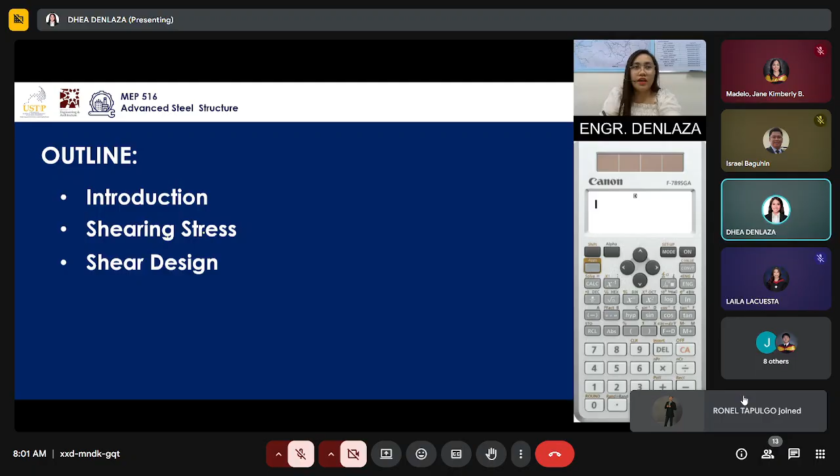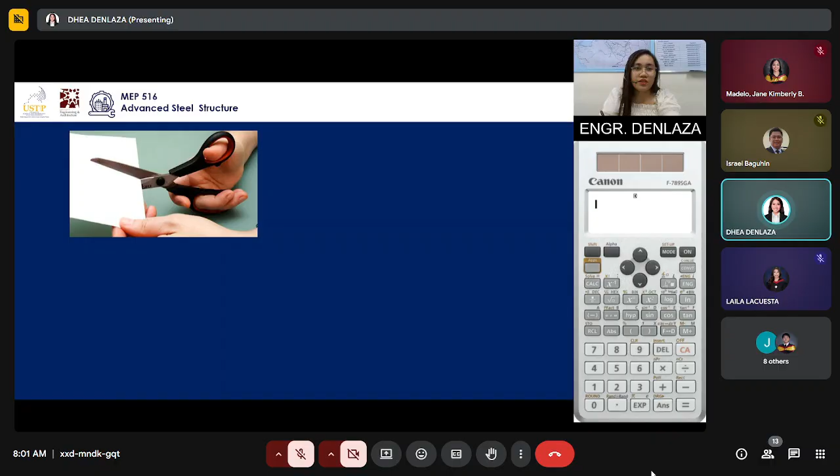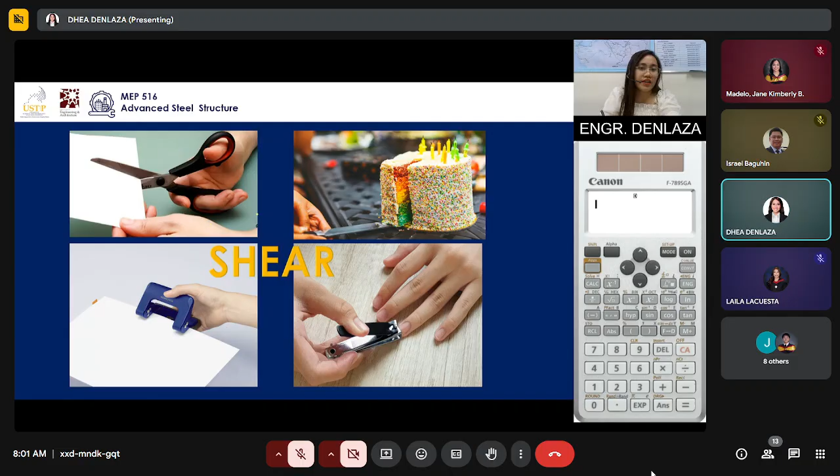Before we dive into our main agenda for this morning, I want to show you some photos. As you can see, cutting of paper using scissors, slicing of cake, punching a paper, and cutting your nails. These four activities are daily examples that we do, exhibiting the so-called shear. Let's try to associate it with our daily activities. These four activities that we usually do in our lives exhibit shear.

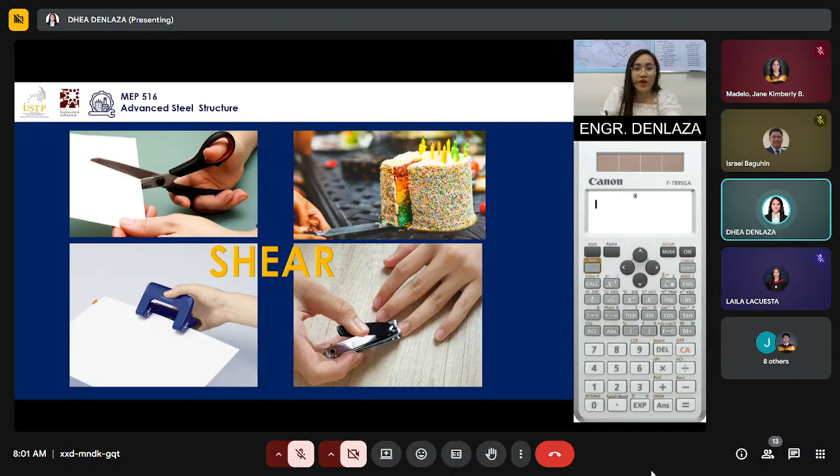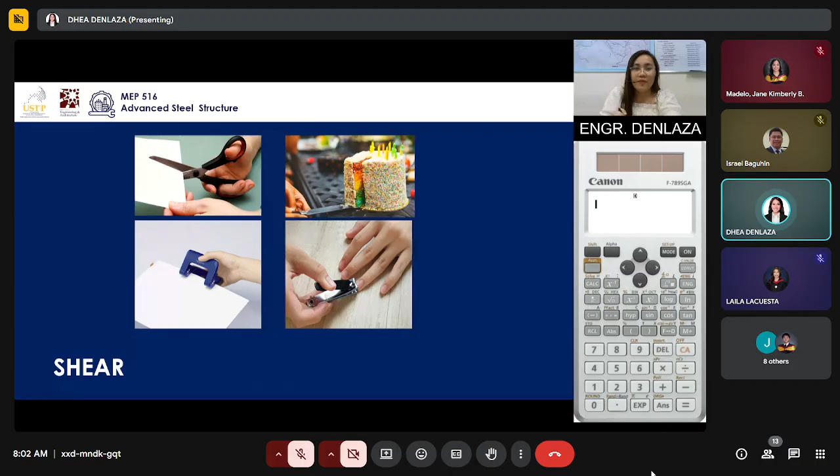Let's define what's shear. By definition, let's go a little bit technical. Shear refers to the forces acting parallel to a surface, causing parts of structural elements to slide past each other, leading to shear stress and potential failure. It's as simple as that. When you say shear, it's the force that is acting parallel to the surface area or the area of contact.

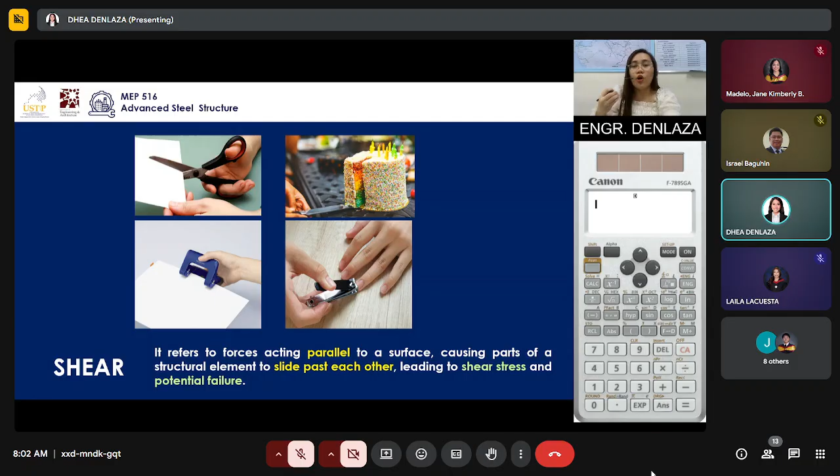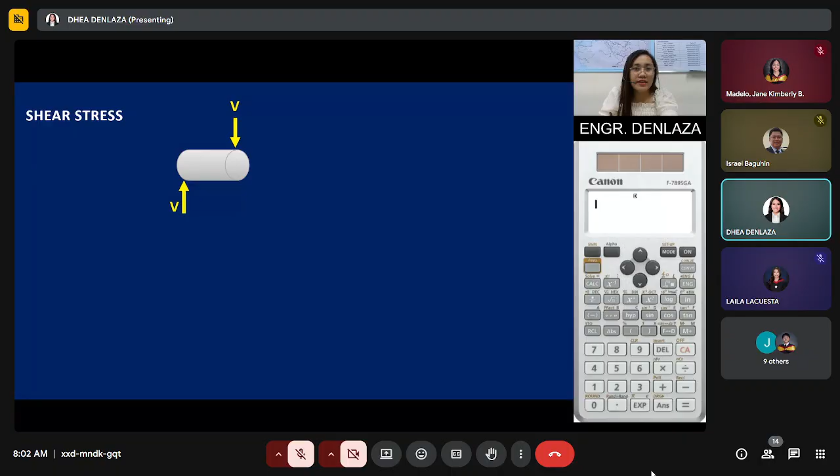The overarching formula for stress is technically force over area, the strongest and most relied-upon formula when we analyze stresses. But when we relate it to shear stress, there is a difference with the area to consider. Since shear force is the force acting parallel to the surface area, the area that we are trying to consider here is parallel to your shear forces.

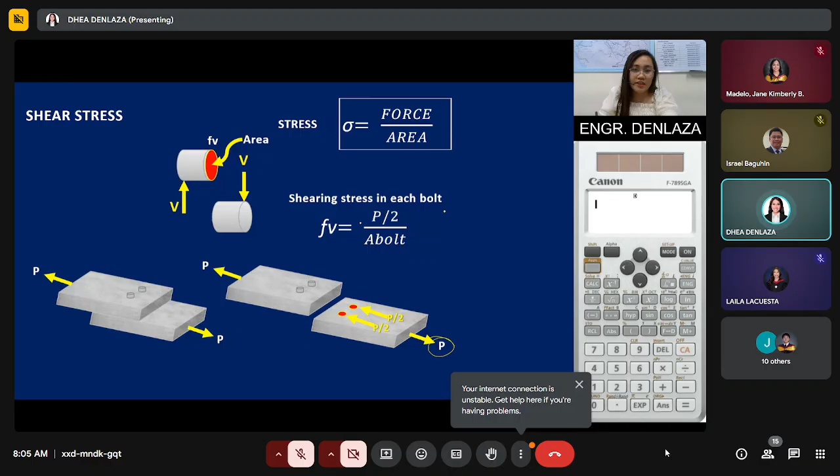Another example, another scenario where we experience shear stress. We have here a member, another structural member, subjected to force P. Now, if this force P is punched through, the result would look like this.

So as you can see, another shear failure here. And another area to be considered here, highlighted in red. This is the area to be considered when dealing with this type of shear failure. This is the so-called punching shear stress.

Punching shear stress has the formula of force over the area. But the question is, what area should we consider here? The area we will be considering is the force over the area, which is B sub O multiplied by its T.

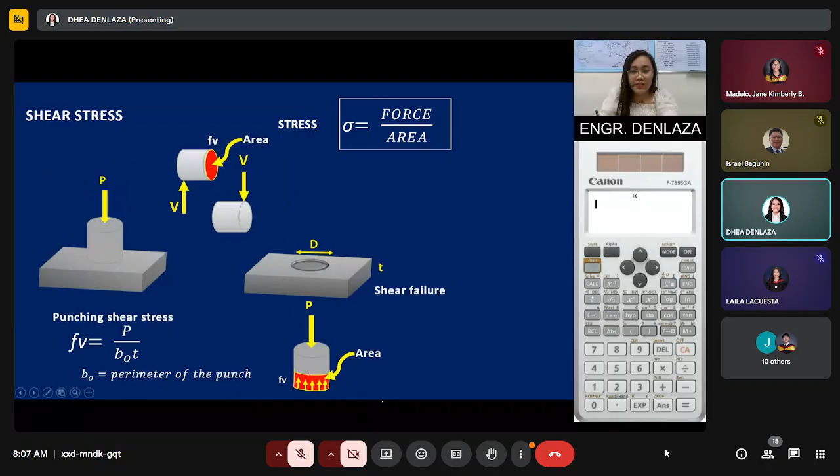Now, what is B sub O? B sub O is denoted as the perimeter of the punch. Technically, the perimeter is just this part here, highlighted in yellow, or highlighted in red. So that's the formula for punching shear stress.

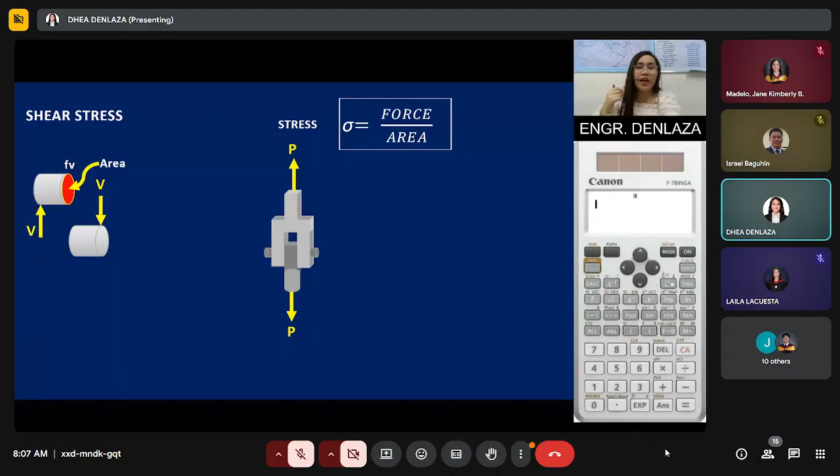Now we have another structural member. As you can see, the ones I showed earlier are just single shear, where only one area is to be considered. But in this part, I'll show another example, wherein if forces pull here, we will now consider two areas.

What are the two areas? Two areas because one is not visible from our POV, but there is a hidden area here, highlighted in red. This area and this area are the two areas you should be considering since both ends have failed.

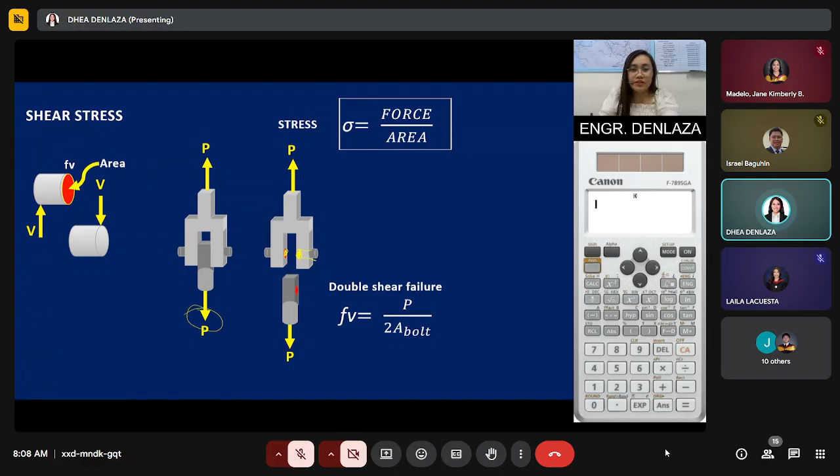Imagining that scenario, if we are trying to consider double shear failure, we will now be utilizing this formula, which is P over 2 multiplied by the area of the bolt. That's what is called double shear failure.

After that, I will be showing you in our next slides the common shear failures in steel structures that are visible here, by definition of these structures. So we have here an example of a shear failure.

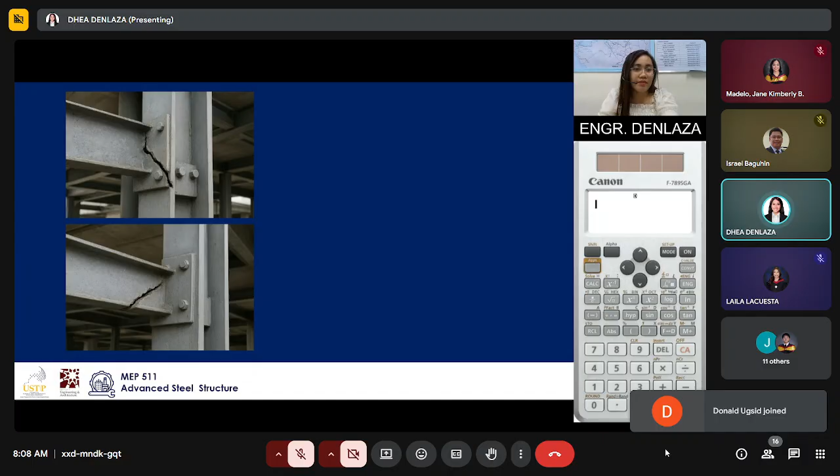As you can see in our connections, here's another example. And here, another one. As you can see, different scenarios: at the base plate, at the I-flange, along the edge of the base plate, and at the welded connection. Bolted as well as welded connections—wherein all of them are exhibiting shear failures.

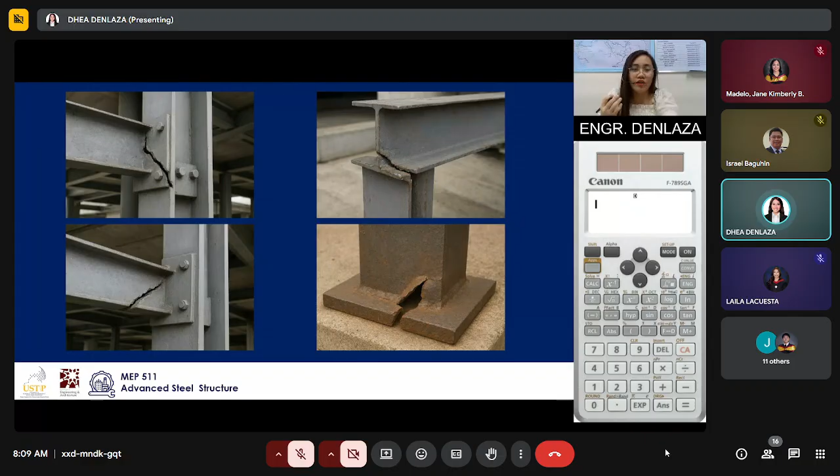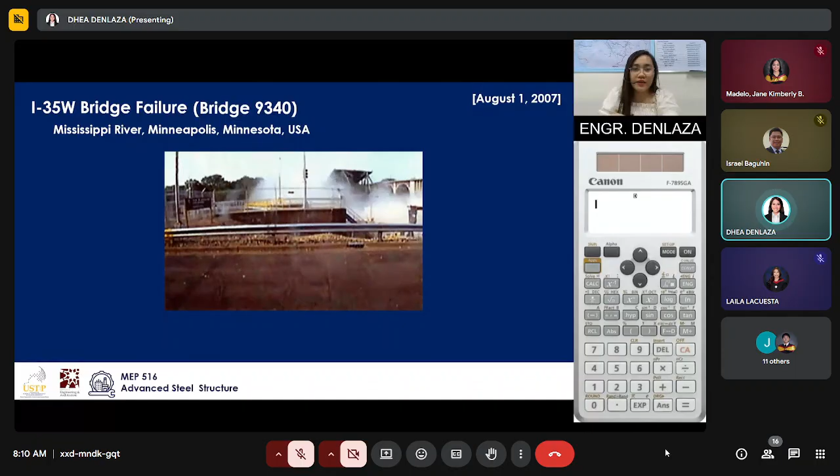As you can see, I have shown you here an image of the exact failure of the bridge, which happened on August 1, 2007. After this failure, there were casualties, but I opted not to include that because it's not something we should highlight—the statistics on casualties. Let's instead go over the technical issues of why this bridge failed.

Long before, this bridge had been constructed as early as the 1960s. But later on, structural engineers were able to distinguish one of its issues: the gusset plate at certain nodes were later found to be undersized, meaning the size it had was not sufficient to carry the loads it should have been carrying. If you look here, it's highlighted with a circle.

According to their research team or investigators, only 1/2 inch thick was used for the gusset plate, instead of the 1 inch thickness that was in the design. So the gusset plate experienced shear rupture along rivets—actually this photo was taken earlier than the incident—where the gusset plates experienced shear rupture along rivet lines and block shear tearing.

The gusset plates were unable to resist the enormous forces being transferred between the truss members. So once a gusset plate failed, the load path was broken, causing a rapid progressive collapse of the truss span.

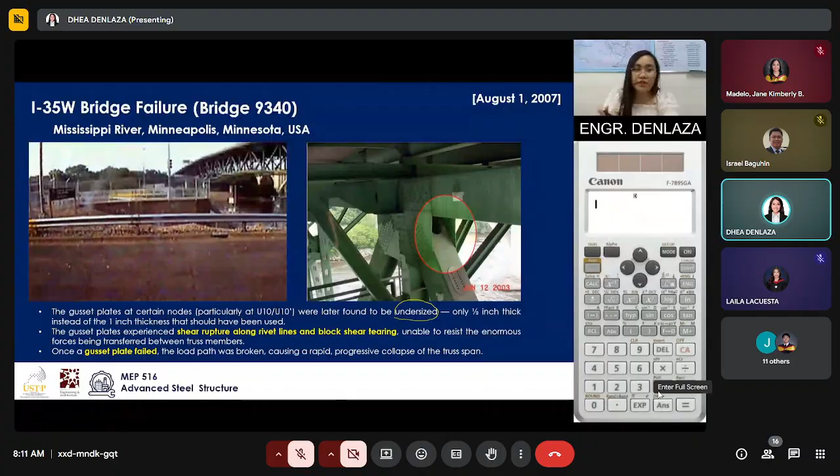So that's the evidence analysis coming from the investigators of this I-35W bridge failure, which occurred on August 1, 2007.

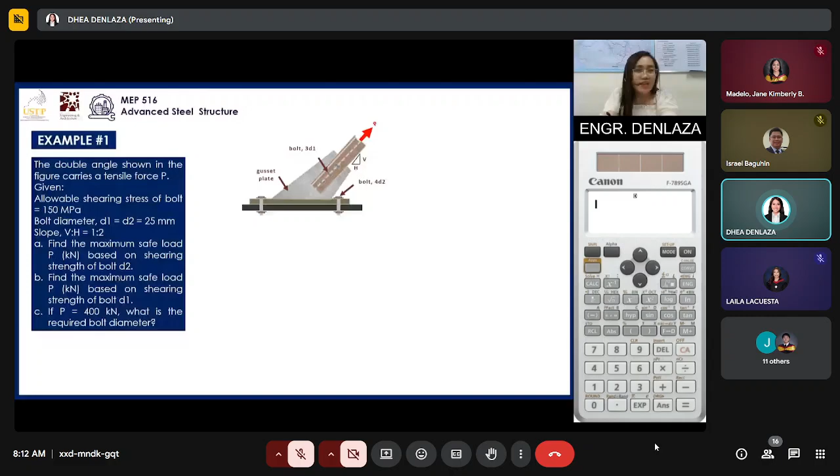If you look at it on its top view, you can see bolts 1, 2, 3, 4. These four bolts are our D sub 2 bolts. Both D sub 1 and D sub 2 have a diameter of 25 mm, and it has a slope of 1:2 in terms of vertical to horizontal.

So the questions are: find the maximum safe load P based on the shearing strength of bolt D2; find the maximum safe load P based on shearing strength of bolt D1; and if P equals 400 kilonewton, what is the required bolt diameter?

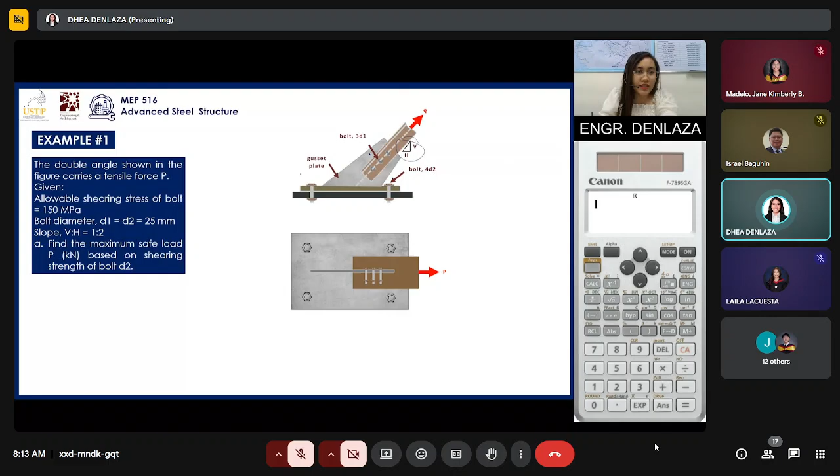Okay, let's take a closer look. If I were to solve this, the first thing I always do when I see a slope is get the angle, because that will be needed in getting our forces. So let's use this 1:2 slope, using TOA.

If this is our triangle, the vertical is 1 and the horizontal is 2. Based on trigonometry, it's opposite over adjacent. So the identity we use is TOA: tan theta equals opposite over adjacent, which in this case is 1/2. So tan theta equals 1/2, giving us an angle of 26.57 degrees.

Now if you take a closer look at this force P, technically it's inclined. Since we have the angle, we will break down this force into its components: Py and Px.

If we are to solve for the maximum safe load P based on shearing strength of bolt D2, since we are analyzing these bolts here, our unknown should come from here, because our allowable shearing stress is already given. So this is where we get the potential value for our P.

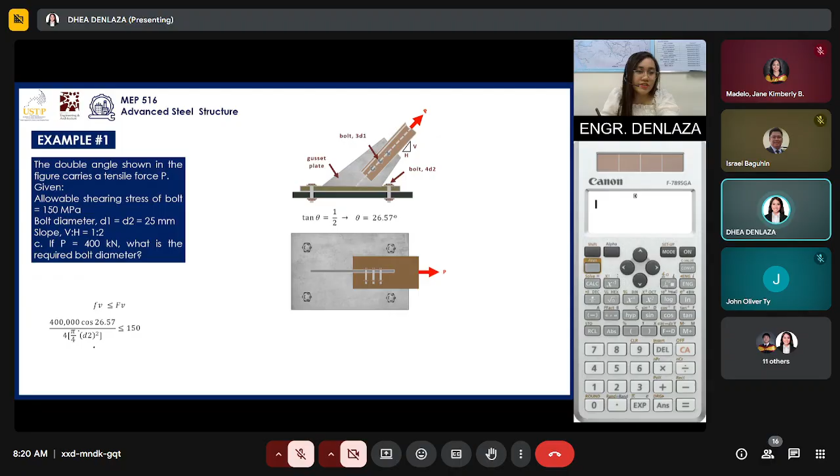It's just 400 cos 26.57 divided by 4 times pi over 4 d squared, d sub 2. That's supposed to be d sub 2, and squared. Then express it with the allowable, so we will be getting 27.55 millimeters.

And if you round that up into a commercially available bolt, that's just 28 mm. So technically, we will be utilizing 28 mm.

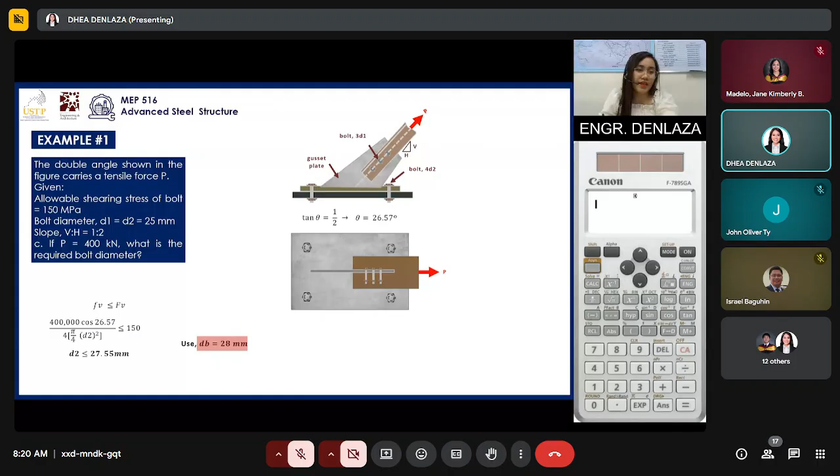Okay, example number 2. Let's try to solve example number 2. Same thing.

The bolt shown in the figure is subjected to a total tensile force of 70 kilonewton. Determine the punching shear stress at the head of the bolt.

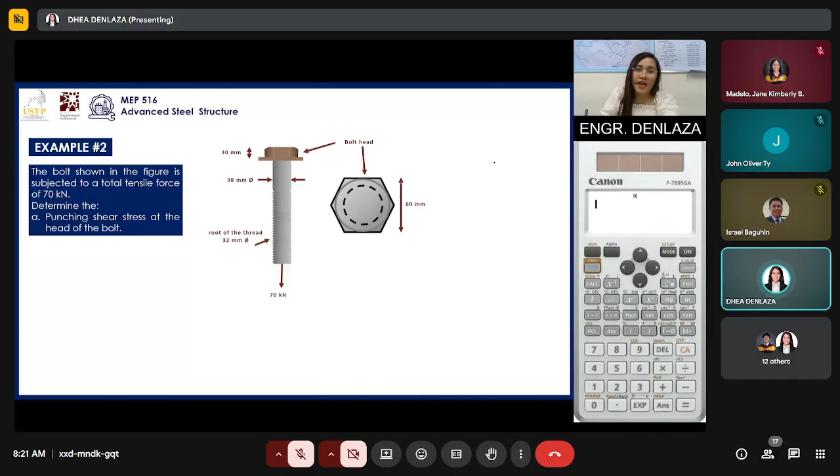If you would see this bolt head on a closer look or in a top view setting, it has a diameter in this span, which is 60 mm.

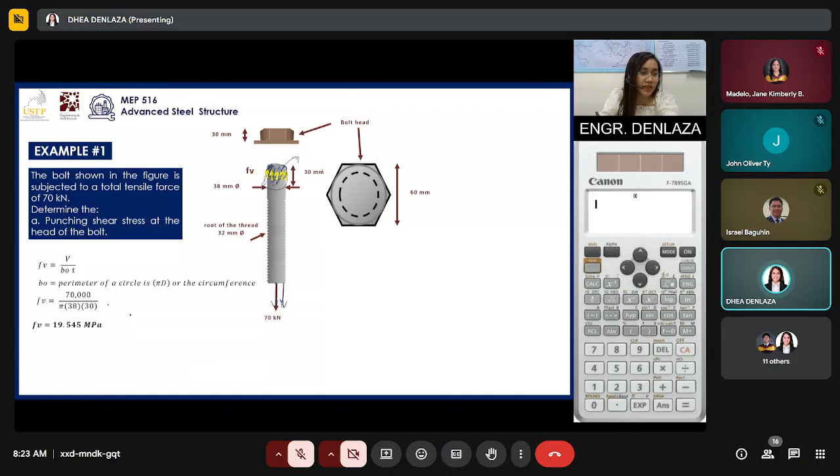So if we simplify that equation, we get our punching shear stress at the head of the bolt to be 19.545 MPa. Okay, we're already done with example number 1.

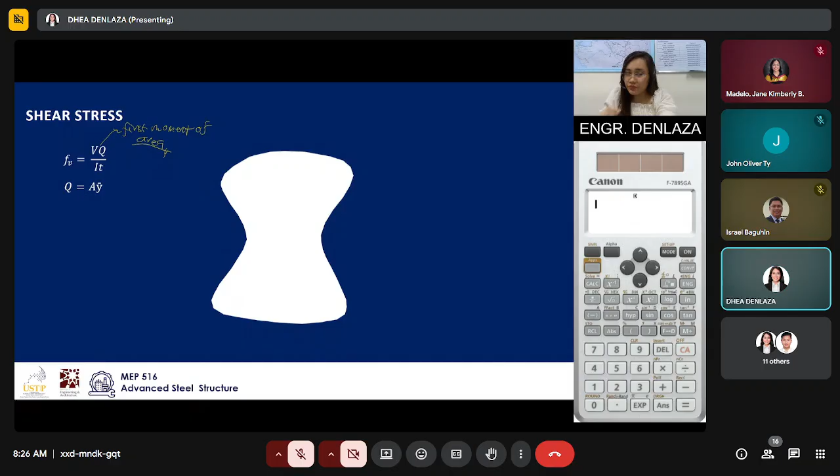But how do we calculate the bar y? The bar y is the centroid from the area going towards the neutral axis. So if this is the center of your area to consider, the distance from this center going towards the neutral axis is just your bar y.

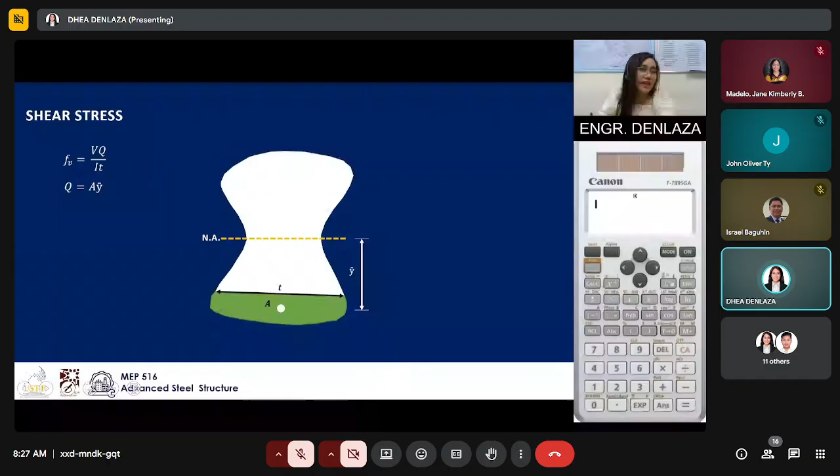Let's try to flip that up. Same scenario — if this is the area you will be considering, this green portion becomes your area to consider. The centroid and the distance from the area going towards the neutral axis, regardless of orientation, is the bar y used in this calculation. This is how you get the first moment of area.

So the first moment of area tells us how the shear will be distributed relative to its cross section. So the closer it is to your neutral axis, the larger its value becomes.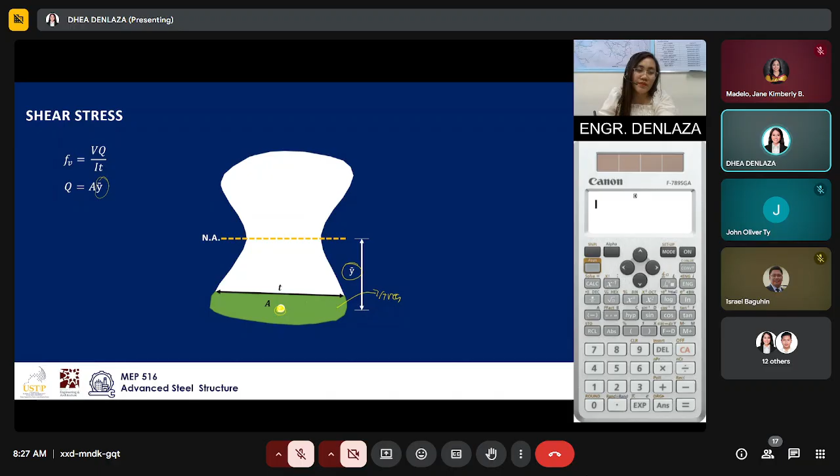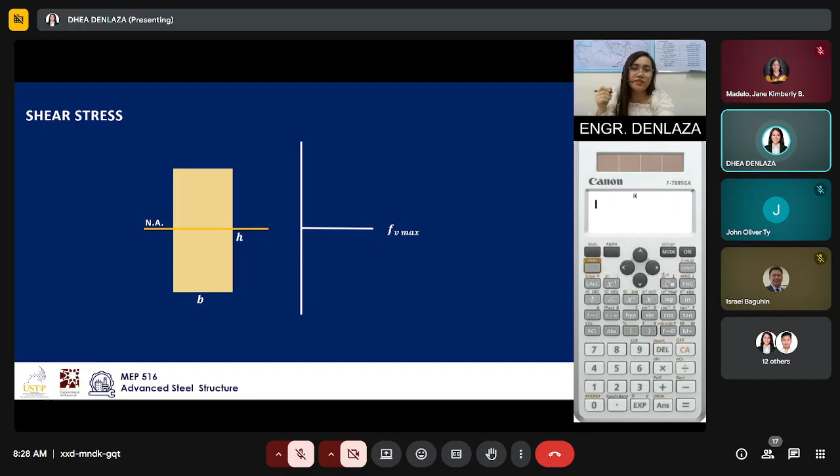So we have different cross-sections. We have here the rectangular one. If rectangular is the behavior, let's see what the shear would look like. It would look like this, as you can see. And we have our derived equation for the maximum shear, which is 3V over 2BD. This is our behavior, and red indicates the maximum.

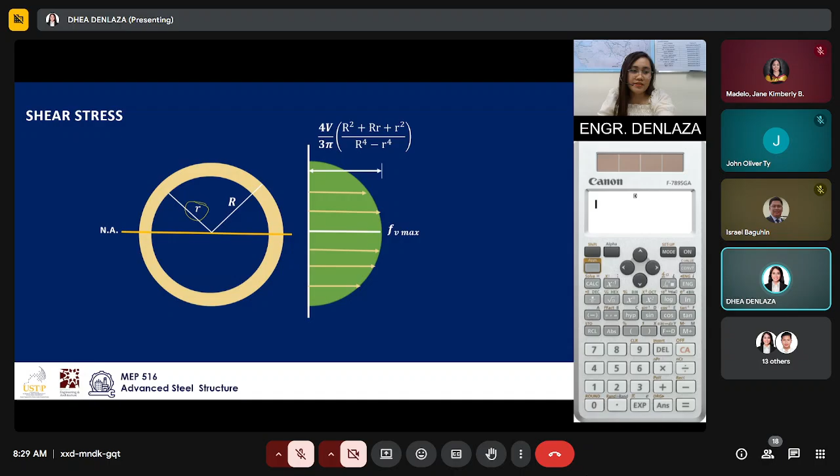Lastly, if we consider a hollow circle, we have here the inner radius denoted as small r and the outer radius denoted as uppercase R. So the shear diagram would look like this. Our formula for maximum shear is 4V over 3 pi, quantity of outer radius squared plus the product of outer and inner radius plus inner radius squared, all over the outer radius raised to the power of 4 minus the inner radius raised to the power of 4. This is just the formula for our maximum shear stress.

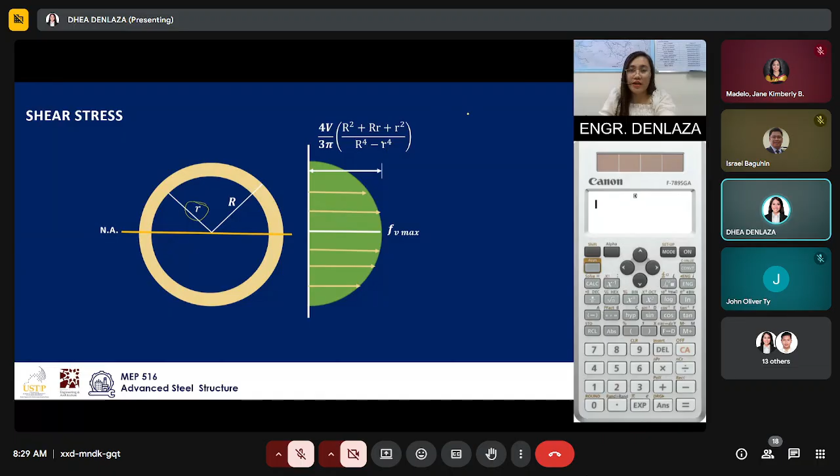So this is the summary of the formulas we discussed: for rectangular, for circular, and for hollow sections.

Another formula is the average web shear stress, denoted as V over d t sub W. This average web shear stress formula is only applicable for wide flange, channel, and Z sections. For other sections, average web shear stress would just plainly be force over area.

For all sections, shear is zero at the top and bottom of its flanges. Based on our shear diagram from earlier, you'll notice that at the top and bottom, the value for shear is technically zero, and it exhibits its maximum at the neutral axis.

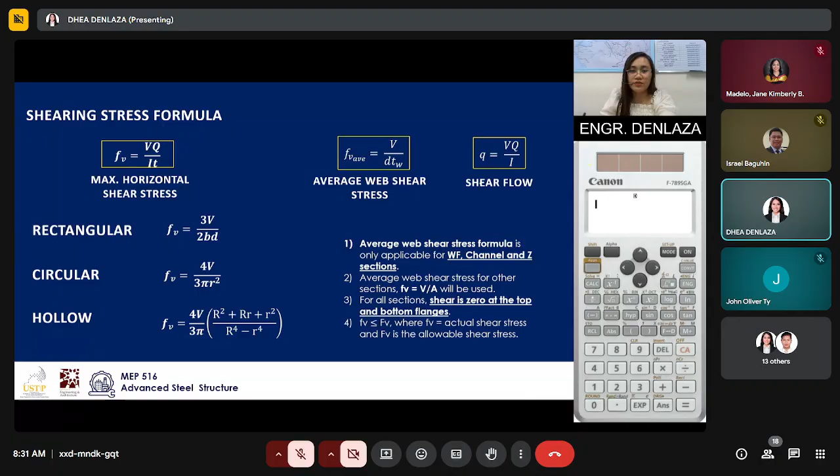So we have here another concept, which is shear flow. Let's try to understand more about shear flow. Shear flow has this formula: q is equal to VQ over I, wherein the unit of shear flow is expressed in Newton per millimeter.

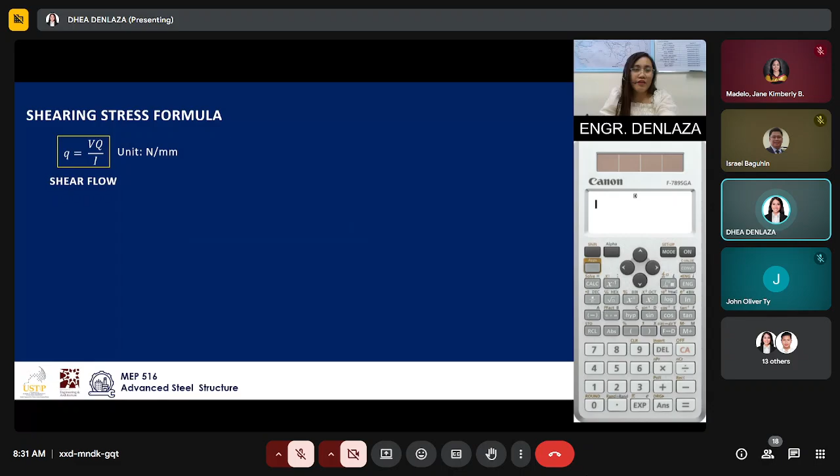If we try to envision how shear flow works, if this is your neutral axis, we have here your C section, a channel. Shear flow, if you have the shear force acting on it, would look like this - carefully notice the tiny arrows that are all over the cross section of this channel. That's shear flow.

If this shear flow works like this, it would rotate in a clockwise direction, having a tendency that the cross section would rotate or overturn. That's the main reason why shear should not be placed here if the cross section is not symmetrical.

So we will not be placing the shear here. Instead, shear should act to prevent the channel section from overturning, directed toward the opposite direction. That transverse shear should be applied at a distance called eccentricity, and the point where the shear should be applied is called the shear center.

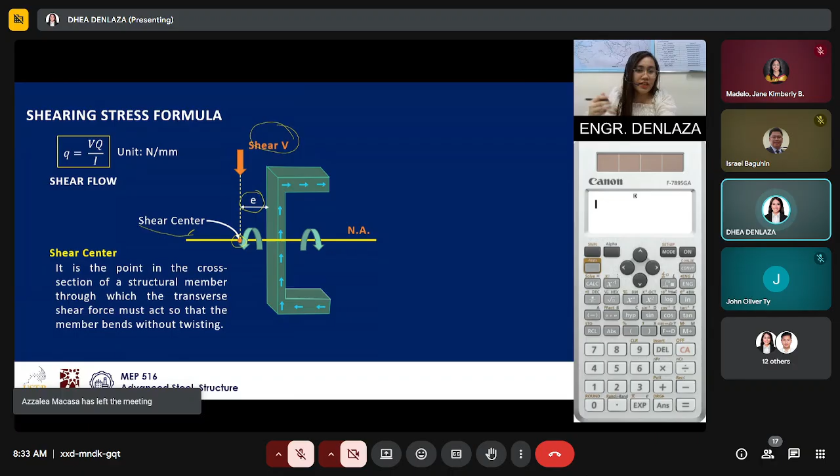So what is shear center? Shear center is the point in the cross-section of a structural member - in this case, a channel - at which the transverse shear force must act so that the member bends without twisting. So shear flow is just how the shear forces are distributed throughout the cross-section of your structural member.

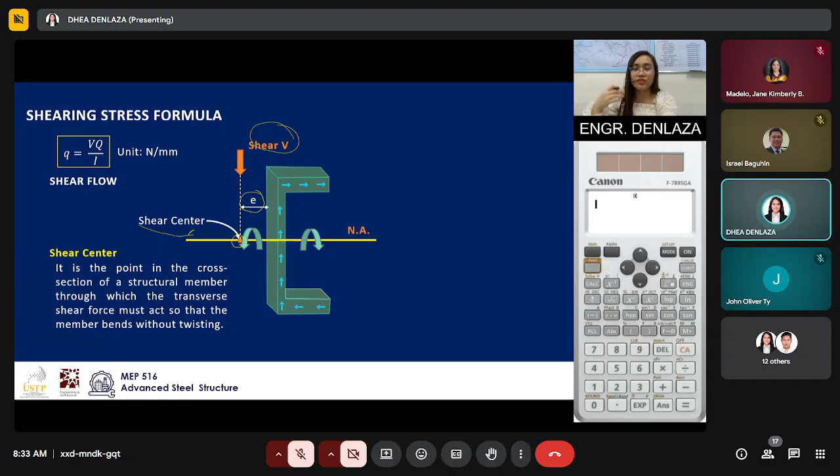Okay, let's try to solve problems. Example number 3: A wide flange section has the following properties - base of flange, depth, thickness of flange, thickness of web, moment of inertia along X, first moment of area, yield strength, and allowable shear stress. We are to determine the shear capacity of the section, determine the safe load the section could carry based on its shear if the length of the simple beam is 8 meters. Since it's simple, it's a simply supported beam.

And determine the shear flow at the neutral axis, and also the shear flow of the portion of the flange 30 mm from its edge.

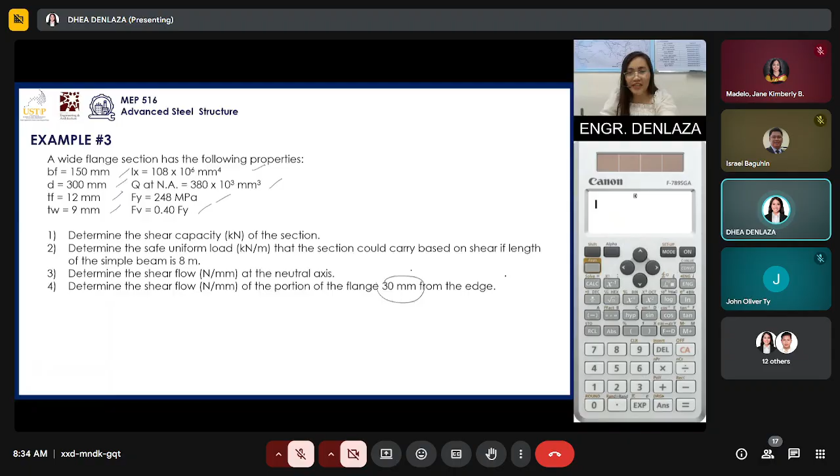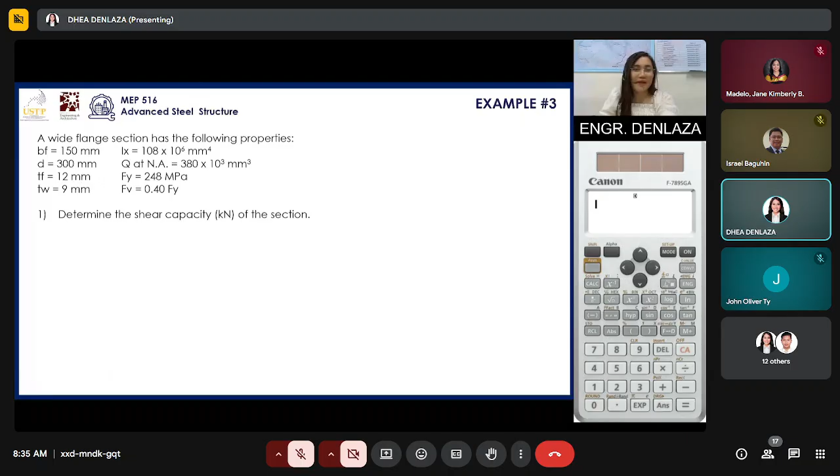Let's try to solve this simple problem. Determine the shear capacity. We have here our wide flange. Let's plot the properties: the web thickness, the depth, the thickness of the flange, and the base of our flange. So our question now is the shear capacity of the section.

So the question is which equation could we use here, and where can this be applied. Technically, we should use this equation because we are accounting for the maximum shear stress, not just the average shear stress. So this is where we place our formula.

This is where we get V. V is expressed as FV, the actual or shear design, to be 0.40 of your yield strength, which is 248. Plug that in, and V is typically expressed in kilonewton, so multiply it by 1 times 10 to the power of 3. And the depth which is 300 and the thickness of your web which is 9. Simplifying that equation gives us 267.84 kilonewton.

That's more than enough. Let's try to solve the second problem: determine the safe uniform load that the section could carry based on shear if the length of its simply supported beam is 8 meters. It has a uniform load which is yet unknown, and that's what we're trying to find in this problem. The beam spans to a length of 8 meters.

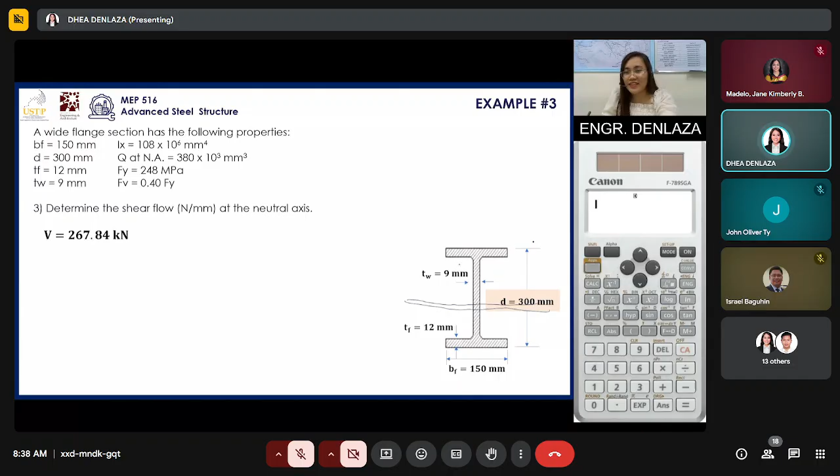Let's try to solve this third problem: determine the shear flow at the neutral axis. The neutral axis is just here — sorry, my drawing isn't perfectly straight, but supposedly it should be centered. Let's just assume the drawing is straight. We have here the overarching equation for shear flow: it's VQ over I.

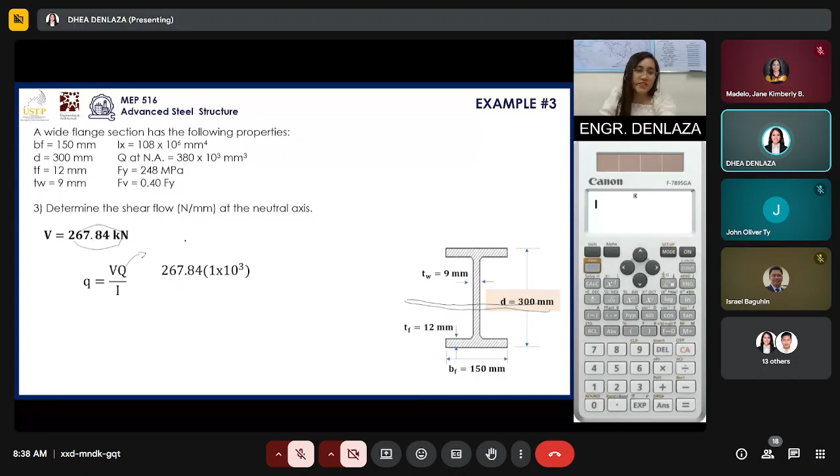Now we have the values: V, which we calculated in number 1. Q, which is our first moment of area — that value is here, and 380 times 10 to the power of 3, all over the moment of inertia, which is 108 times 10 to the power of 6. Simplifying that equation, as simple as it is, we obtain 942.4 Newton per millimeter as our final answer.

Next problem: determine the shear flow of the portion of the flange 30 mm from the edge. How do we envision this problem? We have here 30 mm, and before that let's solve for Q. We already have Q, but technically that was at the neutral axis. We can't use that here because the problem states there's a certain portion we need to analyze for Q, the first moment of area. So 30 mm from the edge — how do we envision that?

Let's go back to our overarching formula for the first moment of area: Q equals the summation of A multiplied by its bar Y. If we try to envision the 30 mm we're talking about, look at the right portion, the shaded region here. If we take a closer look, there's a shaded region which is 30 mm — that's the area we'll be considering. And the 30 mm from the edge, which is the centroid, is what we'll use as our bar Y. So it's just 30 multiplied by its thickness of the flange, because that's the area, which is 12, multiplied by its bar Y. How do we obtain the bar Y?

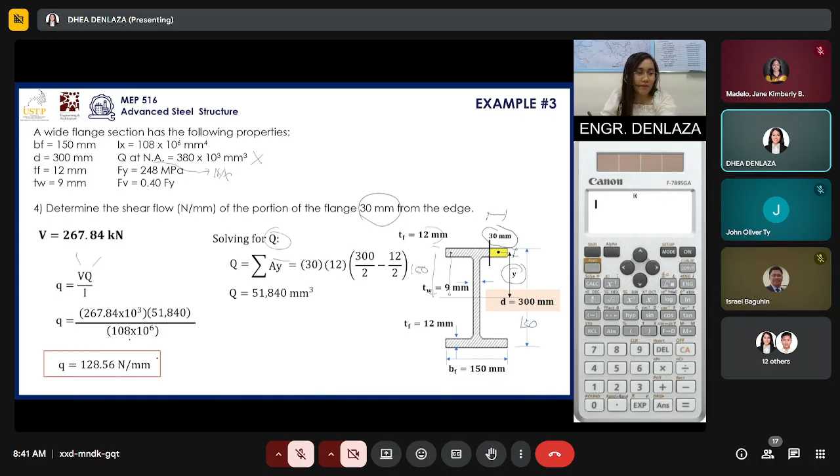So as simple as it is, we now have our Q, shear Q, and as simple as it is, plug that into those values. Since we have our calculated value to be 128.56 Newton per mm, that's our final answer.

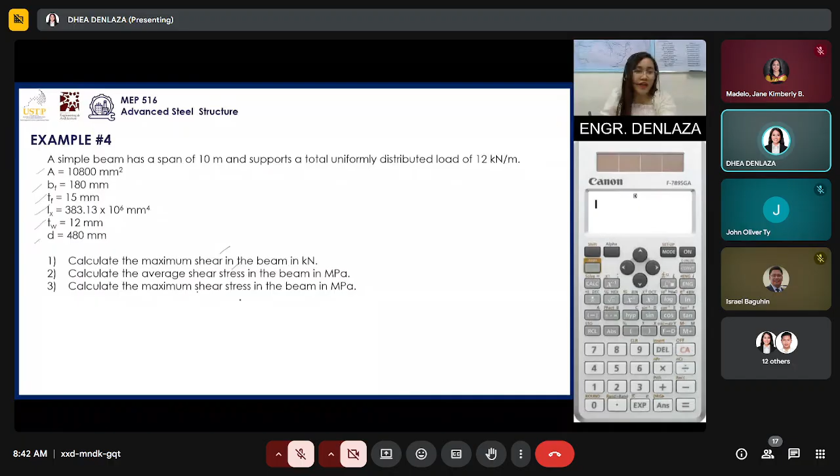So let's try to solve example number 4. A simple beam has a span of 10 m and it supports a total uniformly distributed load of 12 kilonewton per m. We have here our properties of the area: base of flange, thickness of flange, moment of inertia, thickness of web, as well as your depth. We are to calculate our maximum shear, average shear, and the maximum shear stress. So, how do we obtain these values?

So calculate the maximum shear in a simple beam. What's the formula for that? Let's try to draw our uniformly distributed, simply supported beam supported by a pin or hinge and as well as a roller. So we have a uniformly distributed load of 12 kilonewton per m, and our span length of our beam is 10 meters.

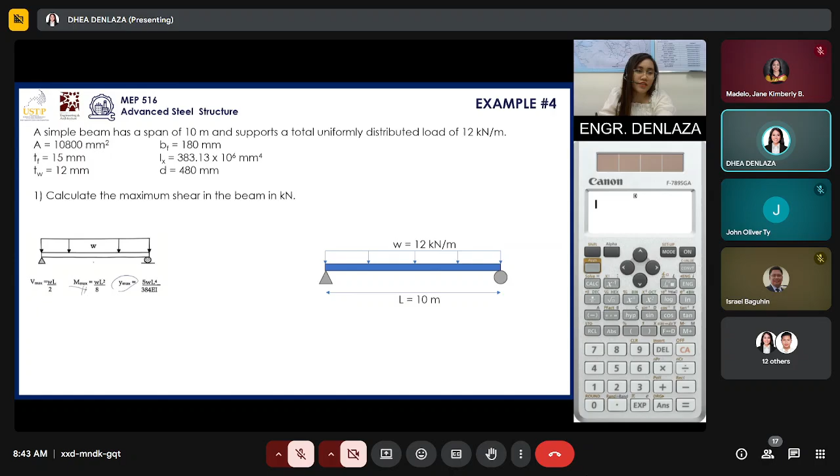We recall this equation: the maximum shear of a simply supported beam is just WL over 2. If it's pertaining to its maximum moment, it's WL squared over 8. And if it's pertaining to the maximum deflection in a simply supported beam with a uniformly distributed load, that's 5WL to the power 4 over 384 EI, which is your flexural rigidity. But since we're only focusing on the shear aspect, we will now utilize WL over 2, which we already used earlier. So our uniformly distributed load is 12, and L is our span length, divided by 2, so we will now be obtaining our maximum shear to be 60 kilonewton.

Now we are to calculate the average shear stress. What's the formula for our average shear stress? It's shear over d times tw, or the area. That's our shear, which is 60 kilonewton, or multiplied by 1,000. And 480, which is our depth, and the thickness of web is 12. So simply multiply that and divide it with the shear. We will be obtaining our average shear stress to be 10.42 MPa.

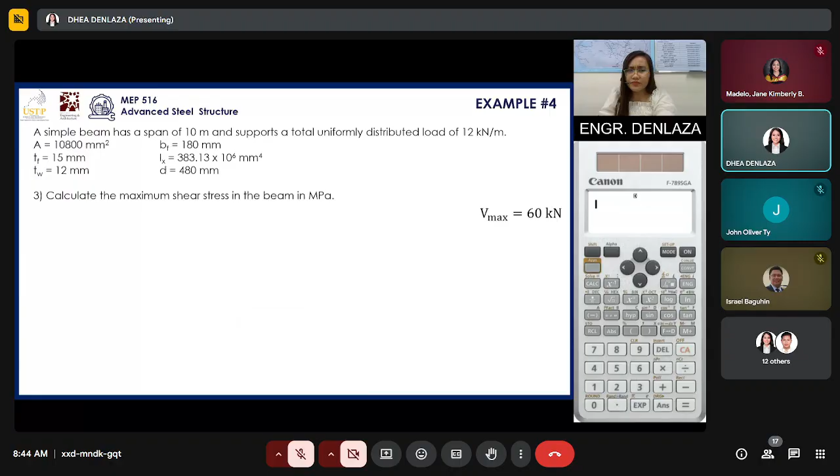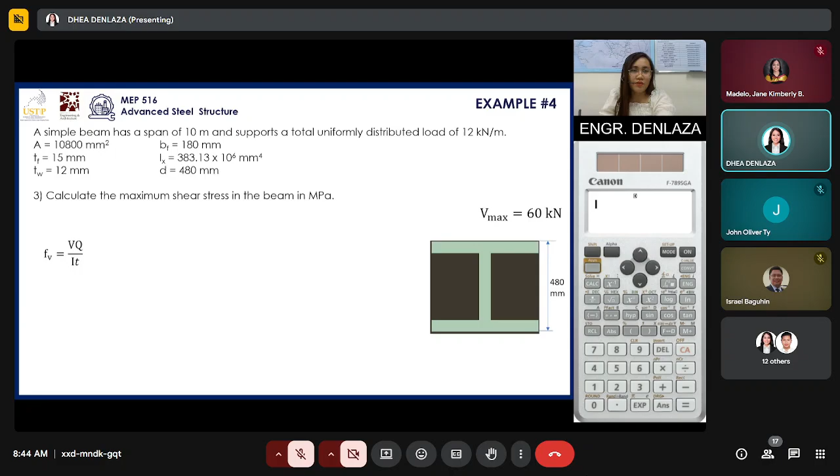Now, calculate the maximum shear stress in the beam in MPa. We have here our default equation, VQ over IT. And this is our wide flange. Let's try to denote our values here. We have 480 as our depth, base of the flange is 180 mm, thickness of your web is 12 mm, and the thickness of your flange is 15 mm.

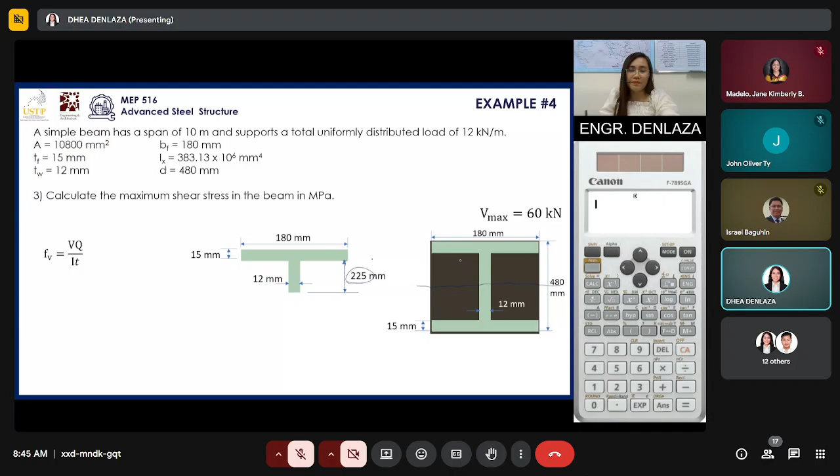And to get the half from the neutral axis, these values come in. So if we consider the distance from the neutral axis to this portion here, it's 225. Why do we get 225? Let's try to understand why. The half of 480 divided by 2 is 240. And take note, we are not considering the thickness of your flange here, so we don't consider the thickness of flange. So technically, 240, because we subtract 15 from it, that's 225. That's how you obtain 225 here. So you can see based on our illustration that the distance is 225.

And to summarize, the first moment of area is the summation of your area multiplied by its barred y. And since we now have two values here, two cross sections, this is A1. What is A1? This portion here, which is the entirety of your flange.

The area 2 to consider is the portion of your web above the neutral axis. How do we obtain that? We have here our area 1, the area of your flange.

So that's 180 multiplied by 15, the area of flange. Now how do we obtain the y-bar here? Y-bar is from the centroid of this portion going towards the neutral axis, which is just 225 plus 15 over 2, or just 225 plus 7.5.

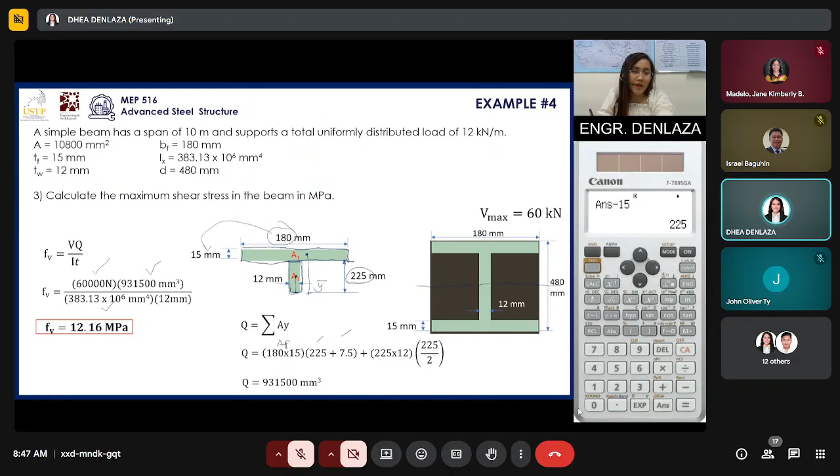Now let's go to our last portion of our analysis for this morning. This is based on our NSCP Code 2015, Section 507, Design of Members for Shear.

I simplified our code. Based on our code, everyone, we have here our nominal strength denoted as Vn, calculated using this equation, which is 0.6 Fy Aw multiplied by Cv. Where Fy is just the yield strength, Aw is the overall depth times web thickness, or just the area of your web, and the Cv is your web shear coefficient.

And if you would read our NSCP code, there are limit states: web shear buckling, inelastic buckling, and elastic buckling. If we read our NSCP 2015 code, what we do is just test which one will pass, then that's automatically the value. We are eyeing for the values of our Cv because we will be utilizing that in getting our nominal strength. But the question is, where do we begin?

So there are conditions stated in our NSCP, guys. For webs of rolled I-shaped members, we have phi V equals 1 and our factor of safety, or omega sub V, to be 1.50. If that's the case, we have to check whether the H over TW satisfies this side of your equation, which is 2.24 square root of E, where E is the Young's modulus of elasticity and yield strength is Fy.

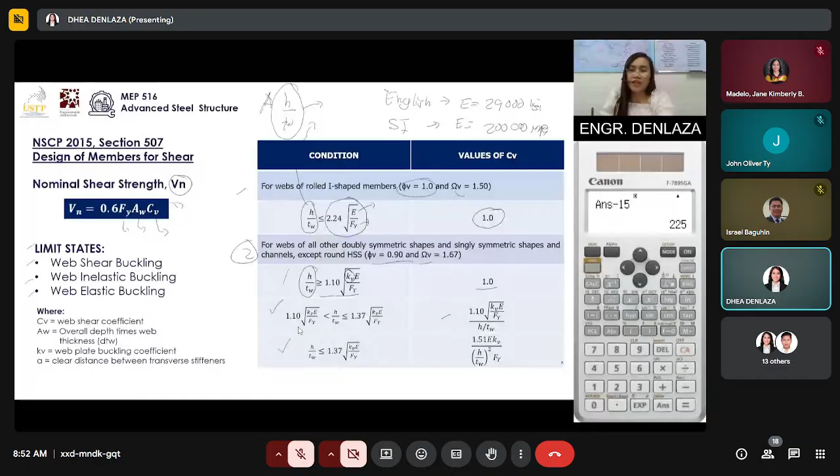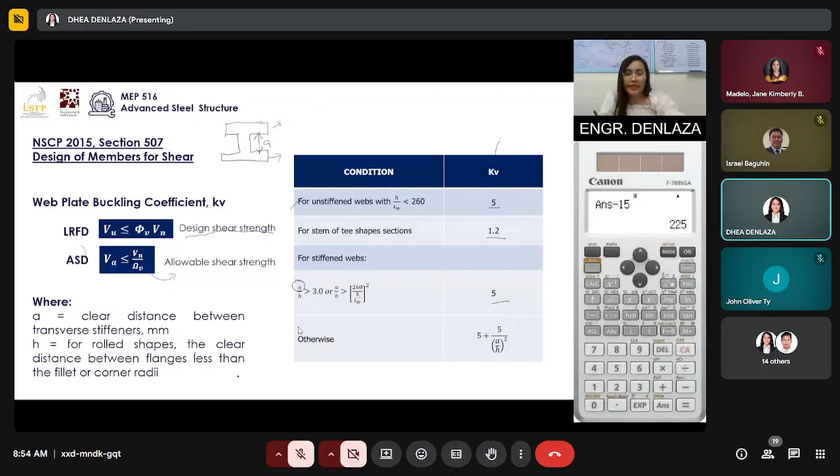Okay, let's try to solve problems in example number 5. A simply supported beam with a span length of 45 feet is laterally supported at its ends and is subjected to service loads - dead load of 35 pounds per foot, including its self-weight, and live load of 95 pounds per foot. If the yield strength Fy is equal to 50 KSI, and W14 by 90, the wide flange section, is used. Check the beam for shear.

So we analyze whether this wide flange is sufficient to resist shear forces. Let's envision the beam we're talking about - a simply supported beam with a span length of 45 feet. Since it's uniformly distributed, automatically we assume there's no point load or anything mentioned, so it's uniformly distributed - that's our WU.

Now, our question is, what is that WU? WU should come from here - the given loads. Take note, the key word here is 'service loads,' so automatically we need to factor them.

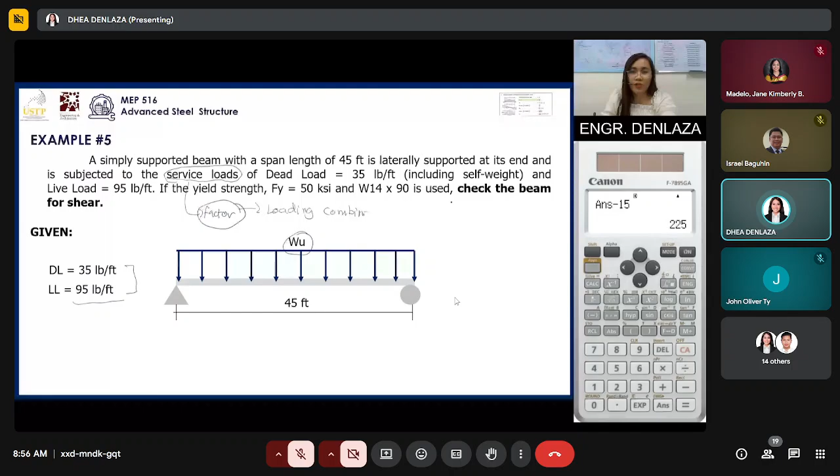So how do we factor loads? Based on our loading combination, per our NSCP, that's 1.2D plus 1.6L. So if we factor these loads: 1.2 multiplied by 35, the dead load, and 1.6 multiplied by 95, the live load. We get a value for our uniformly distributed load of 194 pounds per foot.

Okay, and we have here our equation - let's just put this down first so we can easily pinpoint it later. Okay, next slide.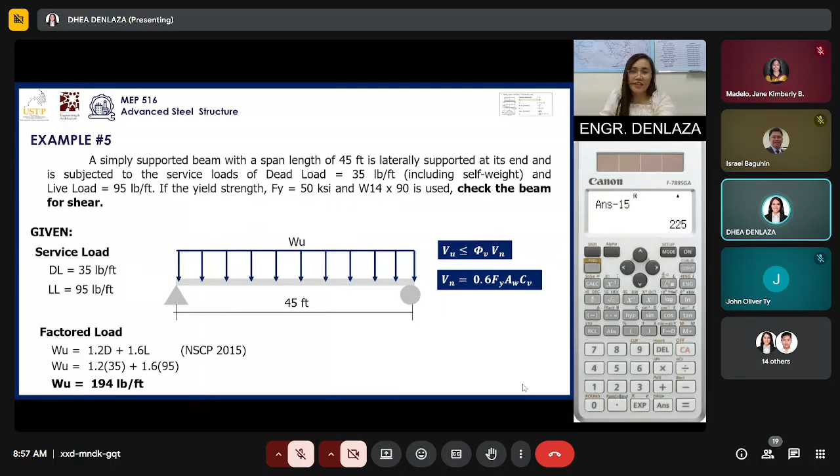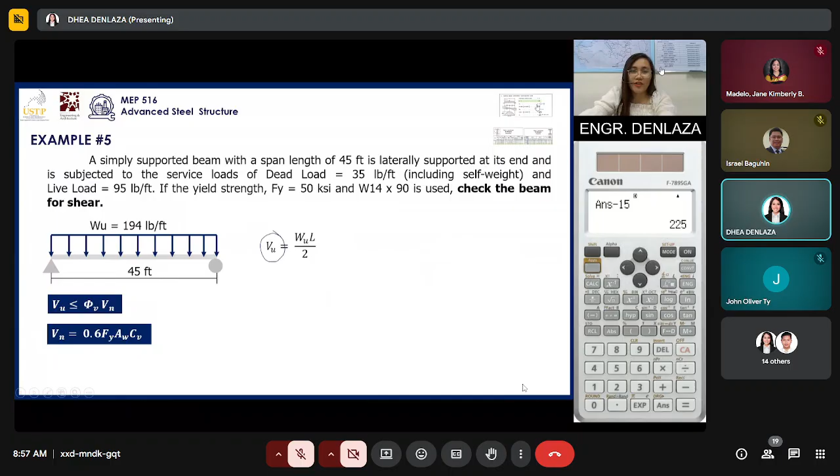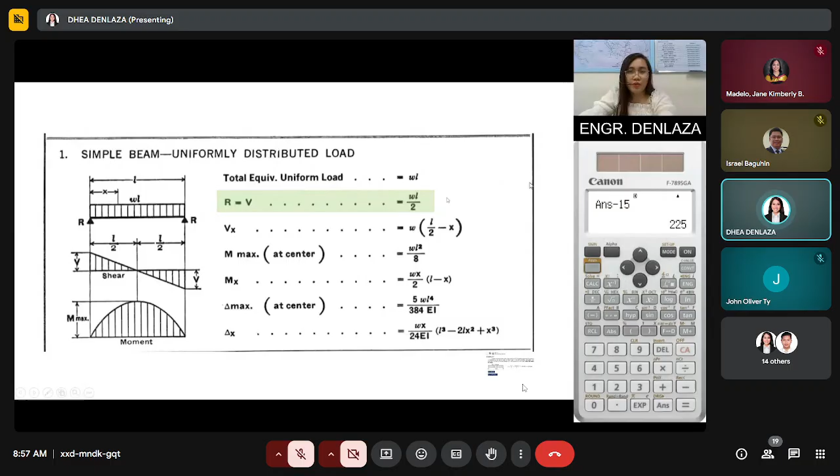If we analyze or get the value for our VU, we need to recall the equation for a simply supported beam - for shear and reaction at its supports, it's plainly WL over 2. That's 194 multiplied by its span length of 45, divided by 2.

You would be getting 4,365 pounds. If you express that into kips, since 1 kip equals 1,000 pounds, divide that by 1,000, we now get 4.365.

Let's move on to the nominal shear strength. Our equation for the area of the web should be DTW. Now our concern is there are conditions that need to be satisfied, so we will check that. Our concern is that we do not yet have the value for H over TW, so where do we get this value?

Let's look at our table. This is an excerpt from the table showing properties of W shapes dimensions. This is the wide flange, W14 by 90, highlighted here in green. So which items here do we need?

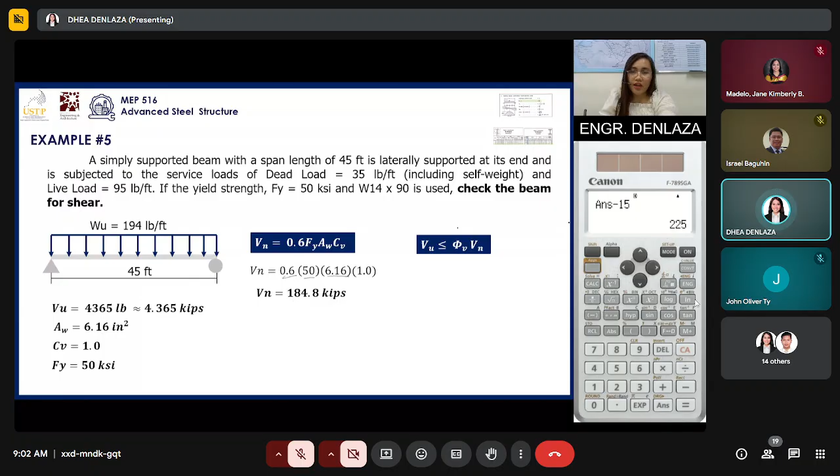Since it is also proven in our conditions that we will be utilizing Phi V to be 1, might as well express that: 1 multiplied by the nominal shear strength we just calculated, and we will now obtain VVN to be 184.8 kips.

We should compare that to the VU, or the actual shear strength, which is 4.365, way lesser than 184.8 kips. So this means that this wide flange of W14 by 90 is sufficient enough to support shear.

If we calculate further for our efficiency, it's just VU over VVN, that's 4.365 over 184.8, and we will now obtain 2.36%. Technically, our conclusion in this problem is that this wide flange of W14 by 90 is adequate for shear.

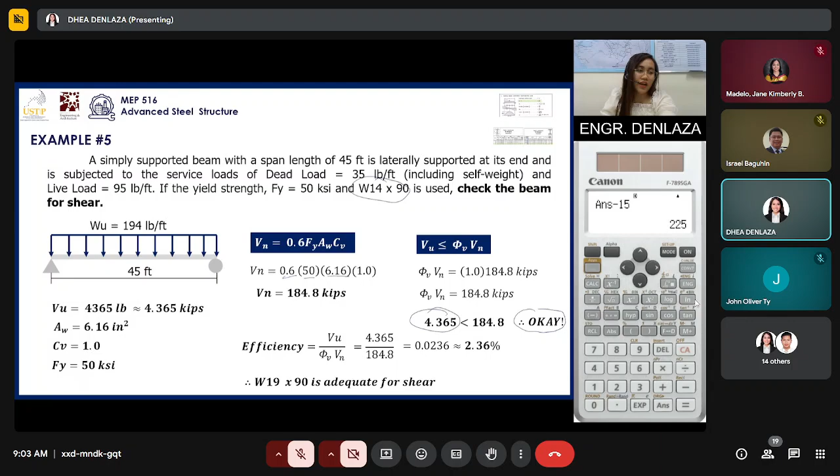Check the adequacy. Here we have FY equal to 345, which is actually just 50 KSI - this is the FY typically used for our wide flange. Where does it come from? Because 50 KSI conversion to MPa, you just multiply by 6.9, approximately. So 50 times 6.895 gives about 344.75, which rounds up to 345 - this is what we mostly use in our analysis.

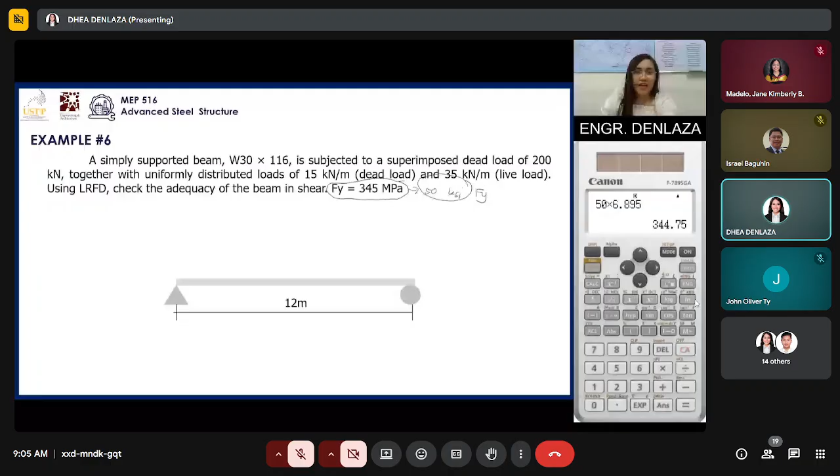Now let's try to envision this beam. We have here a simply supported beam with the given figure. This is a uniformly distributed load, simply supported, spanning a length of 12 m. Take note we have a superimposed dead load of 200 kilonewton, together with a uniformly distributed dead load of 15 and live load of 35 kilonewton per m. The distance from the left support to the superimposed load is 4m, and the other side is 8m.

If we analyze this, LRFD automatically assumes service load, so we just use the loading combination. 200 kilonewton times 1.2D gives us 240 kilonewton.

Now how about your uniformly distributed loads? That's 15 and 35. So that's 1.2 times 15 plus 1.6 times 35. You will now get a uniformly distributed factored load of 74 kilonewton per m.

And it has these two supports. Can we assume VU max is simply WL over 2? No, because WL over 2 is just for a uniformly distributed load alone, but in this case we also have the superimposed load. So how do we calculate the reaction at this support? Using basic statics, it's 240 multiplied by...

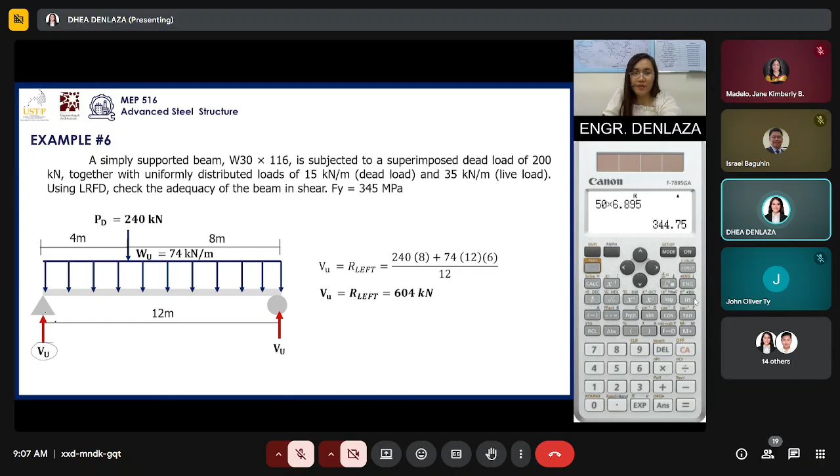8, plus the 74 multiplied by its area of 12, with the centroid distance being 6, all divided by the span of 12. If you simplify that equation, you get the formula for the shear or reaction at the left support - they're equal, since shear equals reaction on the left side. That gives us 604 kN. Let's express that, we'll keep it since we'll use it later.

So let's check if it satisfies our equation for webs of rolled I-shapes - checked, satisfied. Now our bigger question: what is our value for H over TW? We have another property of the wide flange to consider, and this wide flange here has a different value for H over TW.

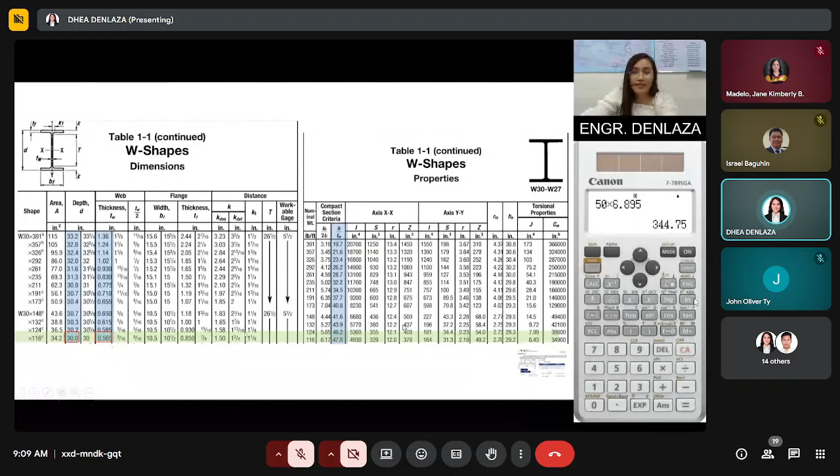If you notice in this excerpt from our table, this is the value for the wide flange we're analyzing, the W30 by 116. If we look at it in the table, we can find it here and highlight it. The values we need are the depth, which is 30, the thickness of the web which is 0.565, and the H over TW which is 47.8.

Take note that these values, 47.8 and the depth, are extracted values in terms of inches - English units. Using a calculator similar to what you have, we convert 30 inches to mm, getting 762. Same with 0.565 inches, converting that gives us 14.351.

If I were to discuss this, could we actually just calculate this directly without converting? I'll show that conversion later. But let's go back to calculating our H over TW equation. If you notice, we didn't convert here - 47.8 is already in English units as given. Take note that the height has units of inches from our table, and T sub W is also inches, so they automatically cancel out. So technically, what is this 47.8?

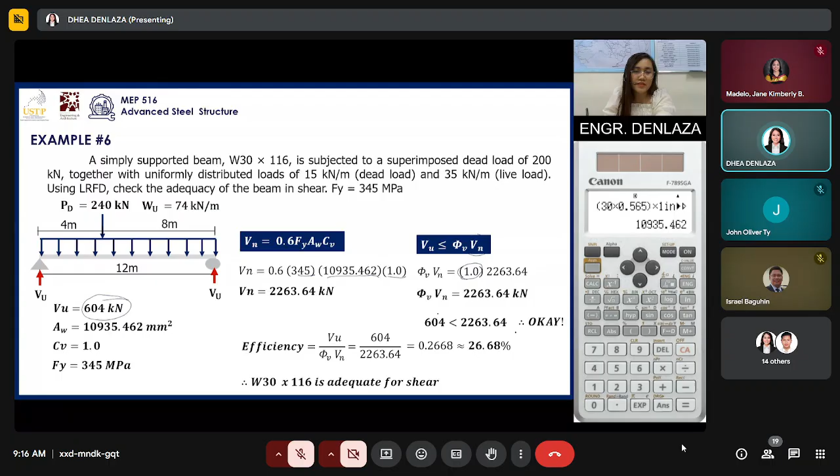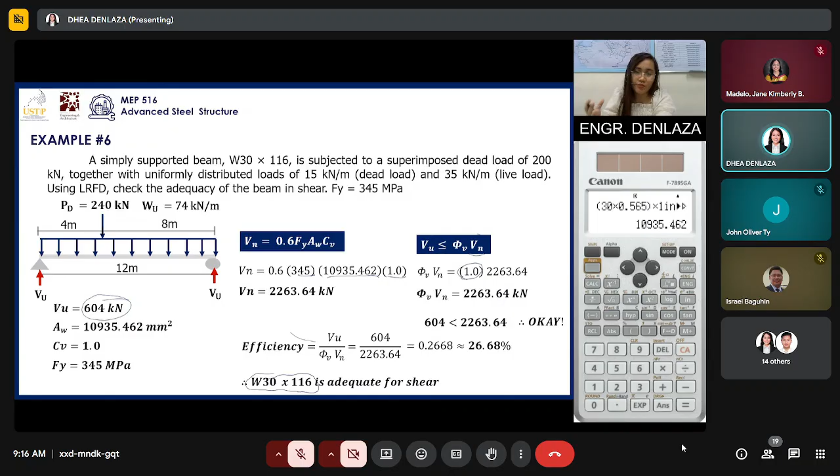So technically, we can deduce that it's okay. So calculating efficiency, that's 604 over 2,263.64, that's 26.68% efficiency. So again, our conclusion in this problem is that this wide flange, the W30 by 116, is adequate for shear, meaning this type of wide flange can support shear forces.